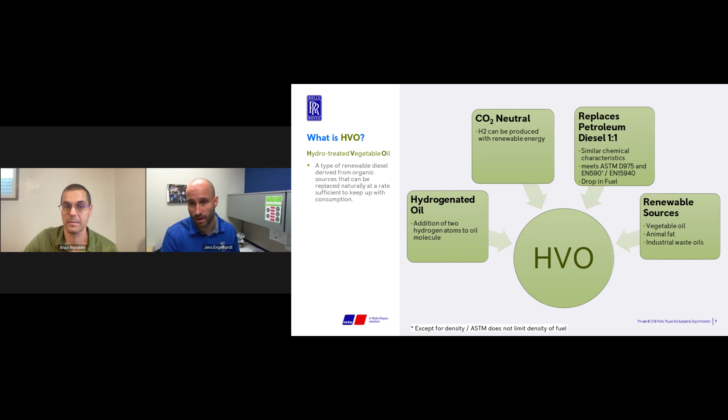But of course, besides CO2 neutrality, we also have to make sure that if we replace our fossil fuel with some other kind of fuel, we don't see any other disadvantages. That means we want to make sure we still get the same power, and the same or even lower emissions, otherwise we jeopardize our label. And in terms of longevity, we want to make sure our customer doesn't have any disadvantages in terms of lifetime. What we're looking for when comparing fuels is whether they are chemically comparable or chemically different to each other. That's what we're going to look into on the next couple of slides.

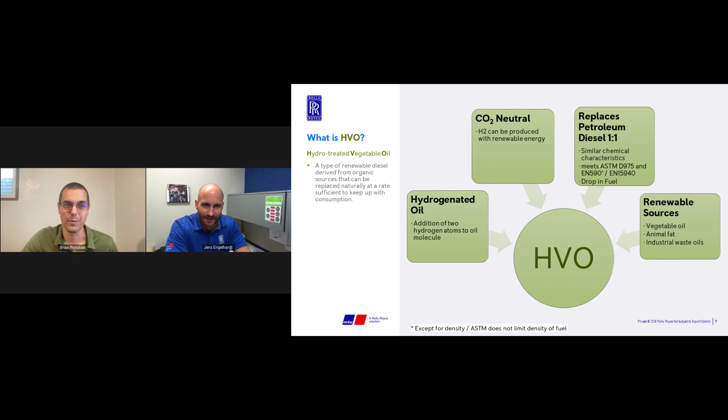And I think this leads us to the next slide, explaining a little bit what HVO is actually not. You talked about how this comes from various feedstocks, and to me that sounds a lot like biodiesel. Let's talk about what it is not, and how it's different. I have a feeling we're going to get into some chemistry, but let's start talking about this from what it is not, or how it's different than biodiesel.

Yeah, so it is not a biodiesel, exactly, Brian. It's not a biodiesel, or as we know it, FAME. You're absolutely right — it uses exactly the same feedstock, the same vegetable oils. Nevertheless, the process that produces this fuel is different, and the result is a chemically different fuel compared to fossil fuel, whereas HVO is chemically comparable to fossil fuel. That's why HVO is also considered a drop-in fuel — you can run 100% on HVO, whereas with biodiesel you usually have to blend it with your fossil fuel.

And I think, just to get a better overview of all these different chemical procedures, we have one slide that summarizes that a little bit. Yeah, perfect, thank you, Brian. On top of the slide, you see the biodiesel and the HVO we're just talking about. As you mentioned, they use the same feedstocks, but the chemical process is different. So for HVO...

...we use hydrogen — that's the hydrogenation process. So we add hydrogen to the vegetable oil. Besides that, the whole process also cleans the oil a little bit. That's why we're going to see later that HVO is actually a pretty clean fuel, as are all the other synthetic fuels, which has different other advantages we're going to touch on later in the presentation.

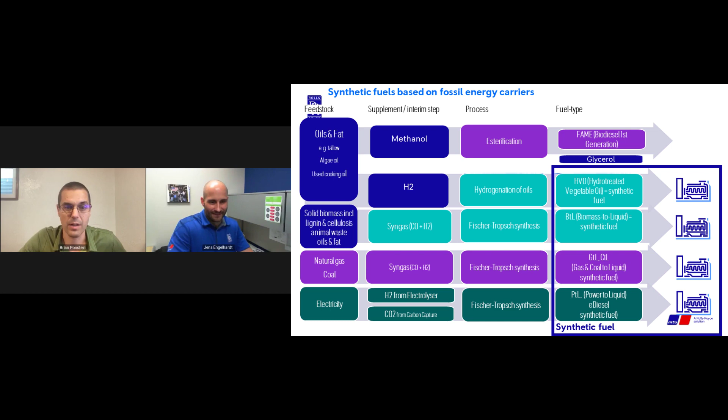Later in the presentation we'll talk about the cetane number, because it tells us something about the ignitability of the fuel. We're also talking about oxidation stability, which is basically an indicator for the shelf life of our fuels.

Looking at the non-regulated characteristics, one important value is the heating value, because it tells us how much energy is chemically bound in the fuel, which we ultimately want to convert into mechanical energy. HVO is actually the best in terms of megajoules per mass. So the heating value here, megajoules per kilogram, HVO is number one.

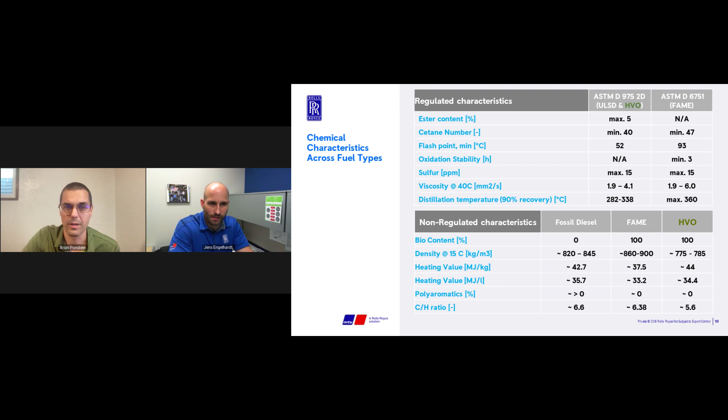Brian, this is more or less the last slide of our chemistry lecture, if I'm not mistaken. Well, we'll try to keep it there. I don't want to go back into what I remember from chemistry - I didn't care for that.

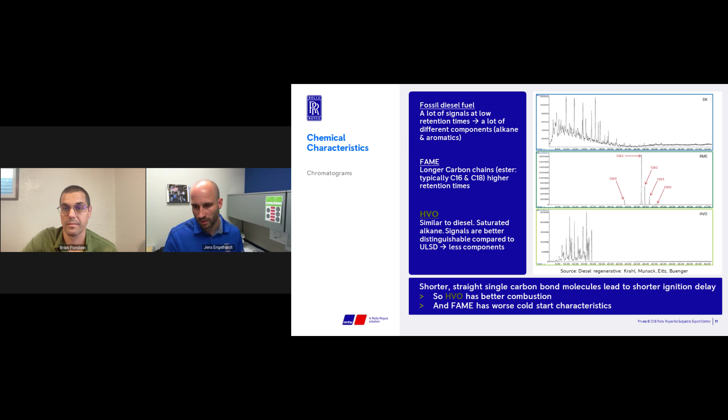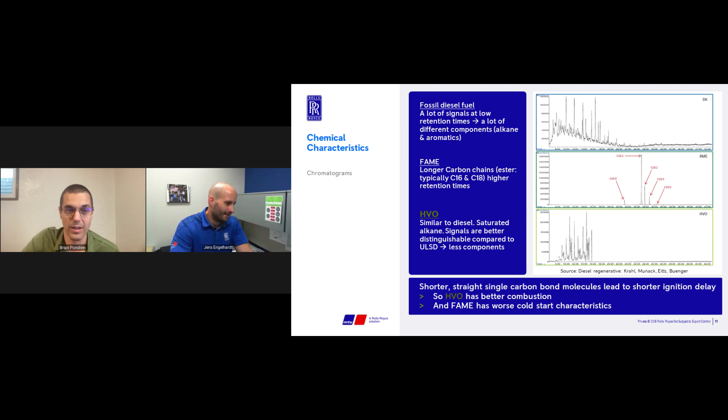Why weren't you my chemistry teacher? I mean, you keep this simple, Jens. I really appreciate it. What I really like is what I'm saying.

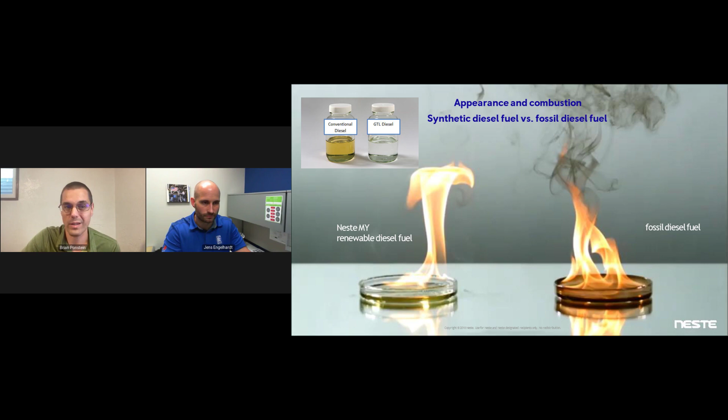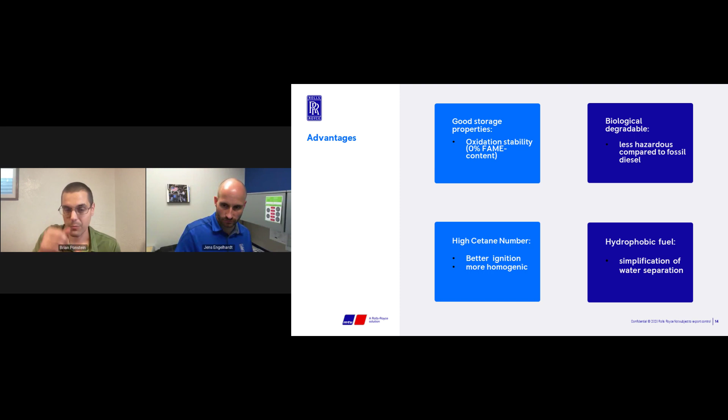But now that we've talked about what HVO is, let's dive more into why HVO. And when we look at that, we're going to talk about some of the advantages. And you hinted at some of this. Really, what I'm seeing is we have these good storage capabilities, but I don't still fully understand why.

So I want to talk about oxidation stability. You talked about cetane number a couple of times. I understand that that's related to ignition, improving that, and just helping out the whole combustion process. But I think there's more to unpack there. You mentioned a little bit about it being biodegradable, less hazardous, and just a cleaner fuel. And then lastly, you started talking about, and you really just hinted on this, the hydrophobic nature of the fuel, basically its ability to reject water. And I know from standby applications, water is one of the cruxes that we have to deal with. So let's first start off with the water content and what's going on there, and help me explain that. I really just have a lot of questions.

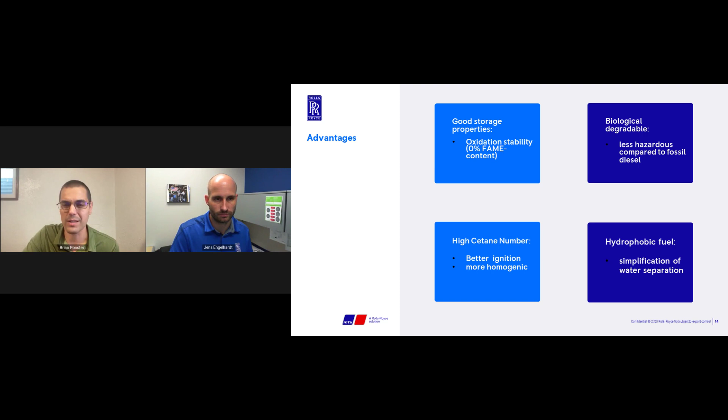Yeah, I try to do my best, Brian.

So we don't want any water in fuel. Unfortunately, there is water dissolved in fuel, and you can basically think of it like our air. If we measure 100% relative humidity at 70 Fahrenheit, and we have the same 100% humidity at 100 Fahrenheit, we know that the air at 100 Fahrenheit, since it's hotter, can simply store more water. It means here in the south, during daytime, we have 100 Fahrenheit, 100% humidity. During nighttime, it cools down to whatever, 80 degrees F. What happens is the colder air cannot hold as much water as the hot air, and we see that basically as condensation, so some of the water falls out. A similar process, exactly the same process basically, happens with the fuel. As you have hot fuel and it cools down, water will fall out. And we need to try to get rid of this water because it can cause severe damage, especially to our fuel system.

Now, the disadvantage of biodiesel over fossil fuel or synthetic fuels is nicely shown here in the chart at the bottom from Donaldson. It simply shows you the capabilities, or basically how much water the different fuels can store, how much water can be dissolved in the different fuels. You can see that biodiesel can definitely store much more water compared to our fossil fuel or HVO. That's why HVO, at least compared to fossil fuel, does not have a disadvantage, but biodiesel definitely is worse, because first of all, we need to get that water undissolved so that it becomes free water, because only then can we separate it. And you can imagine the amount of water that will fall out with biodiesel.

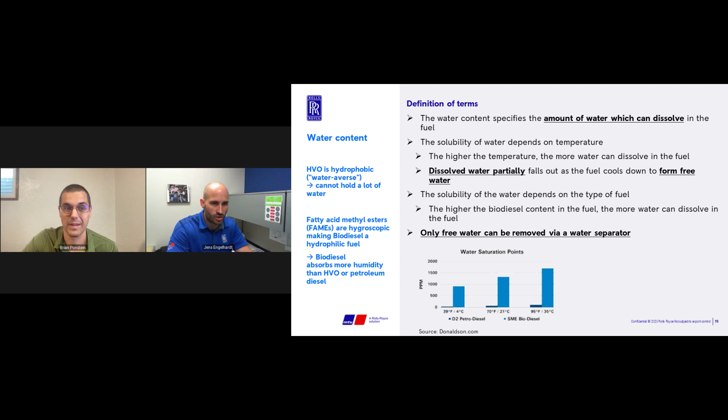And I think, yeah, you mentioned it before. I think you're going to show us also some impressive pictures from the field, what actually happens if people don't pay attention to that. But just quick, oh, no, go ahead.

Some of the issues that we commonly see is we get stuff growing in our tank. Water gives us that environment for fungal growth or microorganisms to start growing in the fuel.

It also causes issues with our fuel components. The fuel is used as a lubricator, and if I can't lubricate because I have a lot of water in there, I'm going to start wearing them out faster. And I'm going to see things like cavitation as well.

The other thing we can see is in a tank, it can start to rust out the tank. It's related to the water topic, kind of a combination of things, but we start seeing that, and it can show up either in our filters or start plugging our inlet lines, and we can have a hard time getting fuel to our system.

Therefore, we have to design systems with water fuel separators. That's always going to be the case to keep the water out. But the easier it is to get that water out, the fewer issues we have. So that really benefits us a lot by having a fuel that's more hydrophobic.

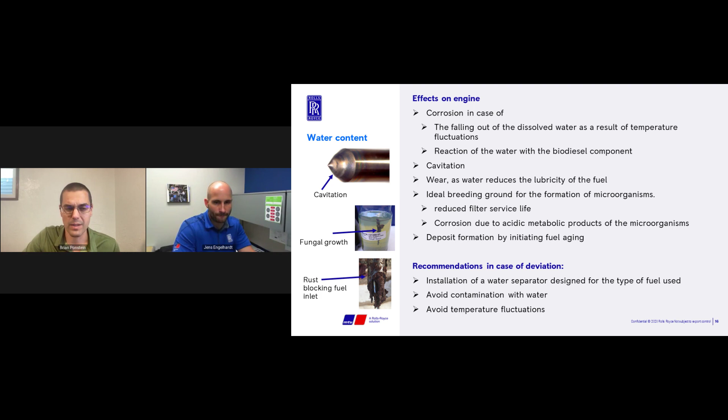You wanted to talk a little bit more about the oxidation or the life of the fuel. What was that again on that chart that we looked at?

The oxidation stability, like you mentioned, especially in power gen, sometimes engines don't run for days, weeks, months. So we want to know how long we can leave the fuel in the tank or wherever we store it before it basically goes bad. The oxidation stability is an indicator for that.

So when we look again at the chemical characteristics, or basically the drivers of oxidation, we have to look at two factors. One is water, we just talked about that. So now we know biodiesel is worse than all the other fuels, and HVO, since it's hydrophobic and doesn't like water, has an advantage because there will be less water as compared to other fuels. And then the second one is oxygen.

So we want to avoid oxygen, because we know if something oxidizes, it usually rusts, it corrodes, and we need to avoid that. I mentioned it at the beginning when we were talking about the hydrogenation process, that the main part of this process is to add hydrogen atoms to the vegetable oil, but it also cleans the fuel. Basically all of the remaining oxygen in the vegetable oil is removed so that there's zero oxygen left in the fuel.

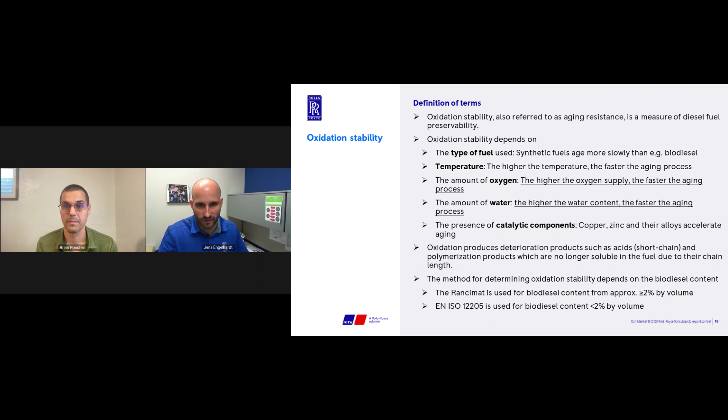And that also explains why HVO has pretty good oxidation stability. I have to say we don't have decades of long-term experience with HVO so far, like we have with fossil diesel fuel, but just based on the chemistry and the science behind it, HVO must have at least the same oxidation stability as fossil fuel.

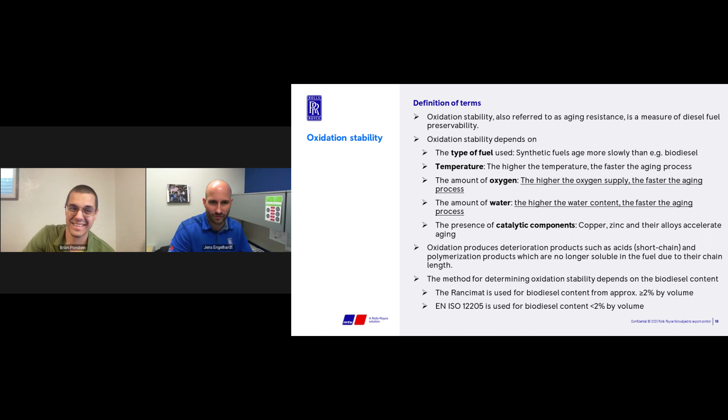And I think, Brian, you found some impressive pictures again from the field. What happens if the oxidation stability is not considered? You know, I like my pictures. That's kind of how I roll.

So what we see when the fuel starts to oxidize is we often see deposits showing up, and these deposits often show up in our injector nozzles and things of that sort. And I'll ask some more questions on this later, but when that injector gets these deposits on it, it becomes a little sticky. And when it becomes sticky, I don't get the performance that I need out of it, so I might not open or close the injector in the timely manner that I need.

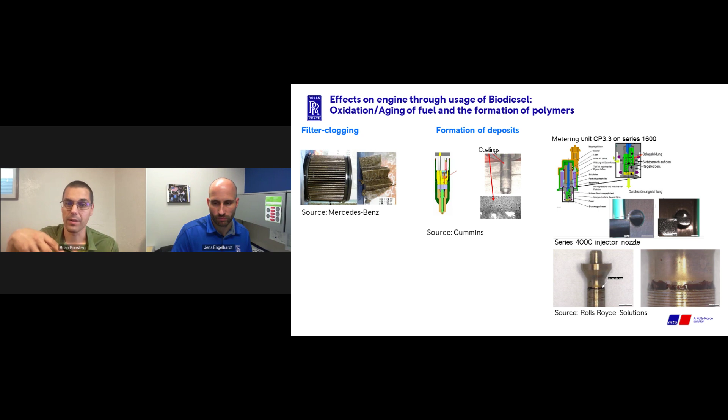Some of the other things we can see, getting into the extreme cases, is these deposits can show up on my filter. This is an example that Mercedes did a study on, where you see a filter that looks like an oily mess. But these are those deposits that have shown up.

And what happens here in a truck application is a little bit different than a power gen. Just to explain the difference, in a truck application, what you see is you're constantly putting your foot all the way down on the throttle, and it just seems sluggish because I can't get the responsiveness out of it.

But in power gen, what we run into is I can't actually get enough fuel to get to the power load that I need to hit. And then, unfortunately, we can't hit it. So then we generally trip out on under voltage or under frequency, whichever comes first, and the unit comes offline, and it causes issues. And we want to make sure that we maintain that reliability. Having a fuel with better oxidation stability or long-term storage just benefits us even more. So that's really what's happening there from an application base.

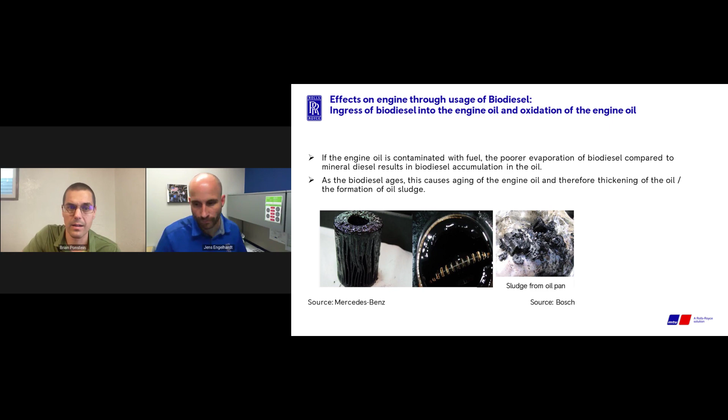And some of the stuff that maybe you have seen out there. But we talked a little bit, and it's related to this, about cetane index or cetane number. I've heard both terms. Maybe you'll help me explain the difference between the two, but what are we really getting at when we talk cetane?

Yeah, what we've touched on so far is basically what happens with the fuel in our application before it's actually injected into the cylinder. Now we want to look into the combustion process itself in terms of performance and emissions. The cetane number is one of the indicators that tells us a lot about the ignitability of the fuel. In our diesel engine, it's compression ignition. What the cetane number really measures is the time difference between injection and start of ignition. This is called ignition delay. The higher the number, the shorter the ignition delay, and the lower the number, the longer the ignition delay.

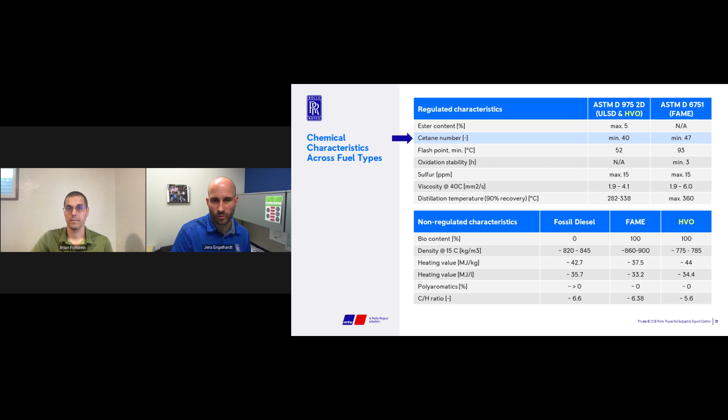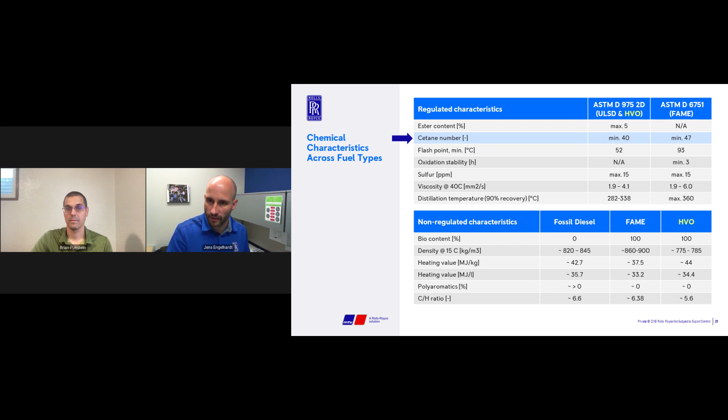Our average gas station diesel, if we think back to the specification we just looked at, ASTM D975 defines a minimum of 40. What we usually see in the lab with gas station diesel is somewhere in the high 40s to mid 50s, which I would consider a good diesel fuel. Compared to that, HVO and other synthetic fuels are in the 70s or even higher. So in terms of ignition delay, these synthetic fuels must be better, with shorter ignition delay. Again, that is explained by the chemistry. They are cleaner, shorter, linear carbon chains. They just ignite better.

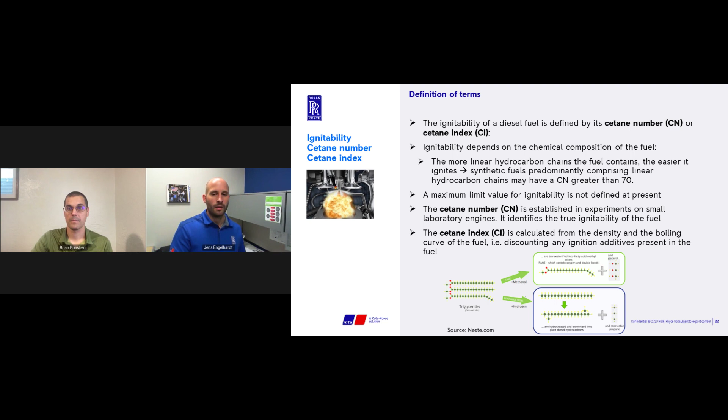Okay, why is that actually important? Because if the opposite happens, if we have a long ignition delay, it can cause massive problems, even leading to catastrophic failures. And it also has an adverse effect on emissions. So Brian, what you can see here is not an HVO fuel. I just took two diesel fuels with two separate cetane numbers to explain the ignition delay a little bit.

The top chart shows the heat release of both fuels, and the bottom chart shows the pressure traces of these two fuels. If you look at the top chart where the arrow is pointing, the red curve, the fuel with the higher cetane number, so better ignitability, you can see the pressure rise and heat release start earlier. On the x-axis, I would say it's at around -11, -12 degrees crank angle. The orange one simply starts later. The graph says there's a difference of about 1.5 degrees. That tells us that the diesel with the cetane number of 50 starts igniting earlier.

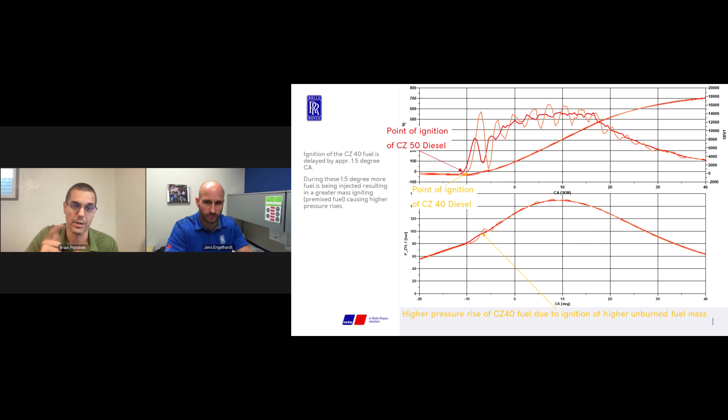But like you said, this all ties back to emissions. And I know that you've done some testing on this as an R&D expert. Let's dive into what you've seen when you've tested this and really focus on the emissions. So when I look at the actual unit, what are the emissions coming out of it? Do they change? Do they not change? What have you seen?

Yeah, so we have actually done two studies. One was actually done in the field, and this is the first one we are looking at. We used mobile emission measurement equipment. They are not as precise as our lab grade equipment, but for comparability reasons, definitely good enough. What the team has done here is replicate the D2 cycle, which is the standard certification cycle for our power gen engines: 100% load, 75, 50, 25, and 10% load.

And you can see here they ran it with heating oil. In Europe, commercial customers are allowed to use heating oil instead of gas station diesel, but it's again chemically similar. And they also used HVO, and I think the most impressive chart is the top left corner. You can see the soot emissions dropped significantly using HVO. Top right, you see the NOx emissions, slightly lower, greatest advantages in the low load area at the 10% point.

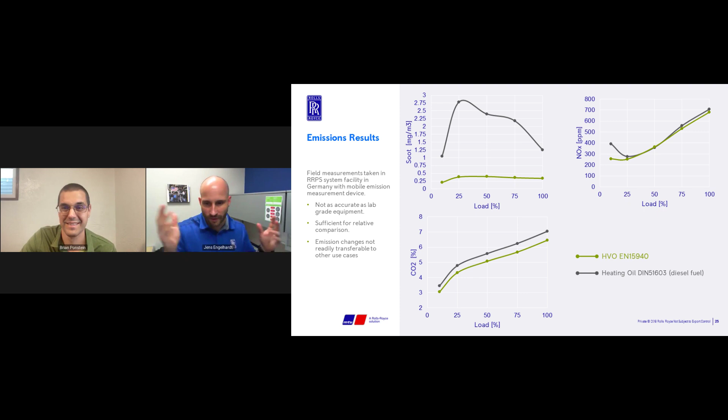And then CO2 emissions, slightly lower, but as I mentioned before, we're talking about decarbonization, we're trying to be CO2 neutral. This is maybe not the significant effect somebody would expect when we're talking about 90, 100% CO2 reduction. Again, we are burning a hydrocarbon fuel, so we are always going to be emitting CO2. That's why we need to look at the entire life cycle of the fuel, and we're going to talk about that in a minute. The CO2 advantage can simply be explained because the C/H ratio of HVO is lower compared to the other one, so it simply has a little bit fewer C atoms in there.

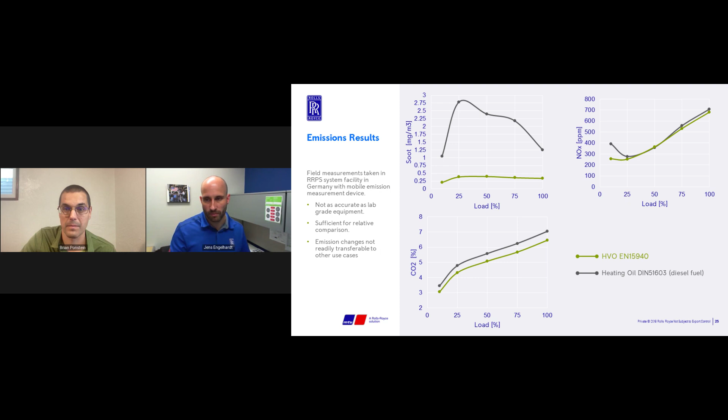But this is really not the big advantage. I think the key news is the emissions do not increase, which is good because that means our emission label is still valid. And actually, most of the emissions we were measuring went down, soot emissions most significantly.

That is quite impressive. Yeah, and this just summarizes it. You can see here soot between 73 and 86%. This is massive. Also, just a quick disclaimer: that cannot be simply transferred to any other engine, because the type of engine and the way the combustion works need to be considered.

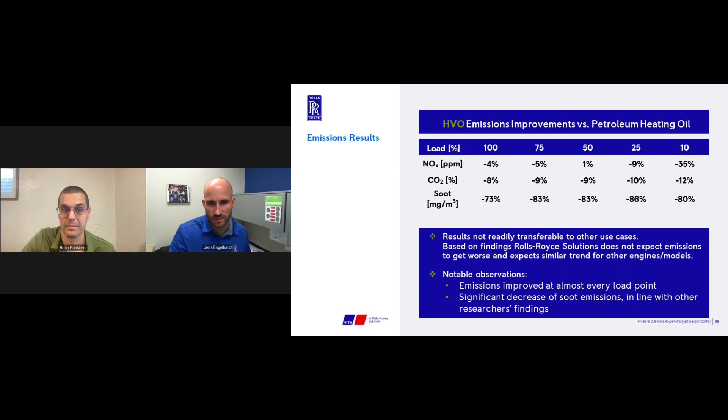But we're going to see later that we confirmed these results in our lab, and we also read some papers from other researchers, and our experimental results are basically in line with theirs. So if you want to use HVO on your engine and it's been approved by your manufacturer, you should see similar trends, definitely.

Brian, these are the results of the second study we did. This was actually in our lab, a 1065 certified lab. And we ran exactly the same D2 cycle with HVO and ULSD. Here at the top, I do not have the individual results of all 5 cycle points. This just shows the weighted average of the total cycle. And on the upper right corner, you can see the soot, or in this case, we measured gravimetric PM emissions.

Significant reductions. I'm sorry, the scaling is a little bit misleading because it looks like the NOx emission reduction was greater than the PM, but it's not true, because on the NOx side we come down from 4.6 to maybe 4.35, whereas on the PM side we come down from almost 120 milligrams to 80.

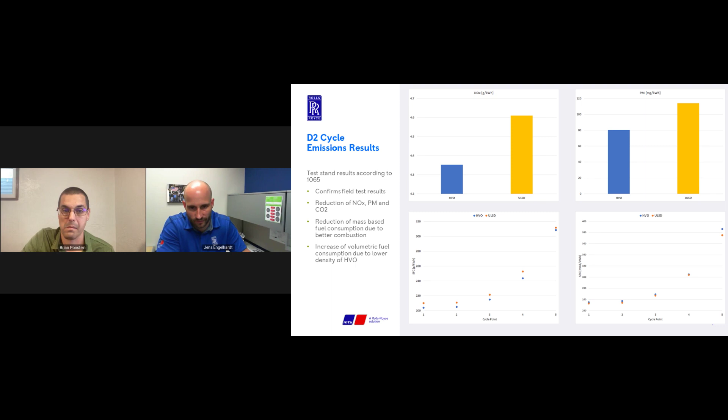So the lab test confirmed the field test, and of course we also measured fuel consumption because that is equally important. And here you can now see the difference I mentioned before when we compare the heating value in terms of megajoule per kilogram versus megajoule per liter, or per mass versus volume. Bottom left is the specific fuel consumption as we know it in grams per kilowatt hour.

And it's not a surprise, since HVO has the better heating value and better combustion efficiency because of the higher cetane number, that HVO has lower specific fuel consumption. But if we look at the chart on the right side, again, we see the density disadvantage of HVO. So in this case, the fossil diesel has a slight advantage over HVO fuel.

And like I mentioned, I'd like to talk about whether we need to change how we do our fuel sizing, if we should do it more like the airplanes where we do it by weight, or if we should keep volume. But that's a whole other webinar, a whole other discussion.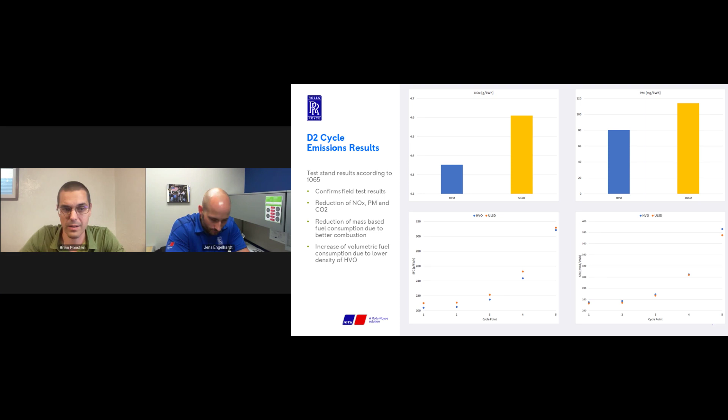But you said we had some data based upon other sources just to look at that. What do we got? Yeah, so it's not a coincidence or just luck that it works that well with our engines. Other researchers basically found the same results. This is a paper I found, an automotive study here at full load. Please just focus on the black and the orange lines. They also did some additional testing.

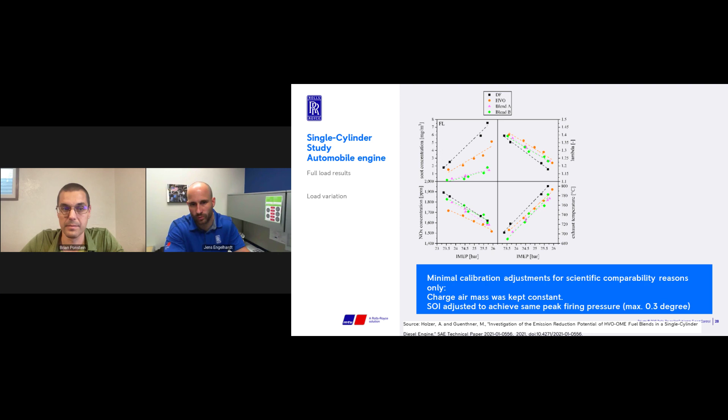So you can see black is our fossil diesel fuel, orange is the HVO fuel, and again, top left corner, soot emissions, and all across the board the orange line is below the black line, which confirms the soot reduction we have seen as well. So this was the full load result, and I think they did the same for part load points.

And the chart on the left side looks a little bit different now, because here it's soot over NOx emissions. But again, at constant NOx, 2 gram, 3 gram, 4 gram, 5 gram, the orange line is always below the black line. So at the same specific NOx emissions, you will always have lower soot emissions with HVO. And this confirms our findings and also the findings of the competition.

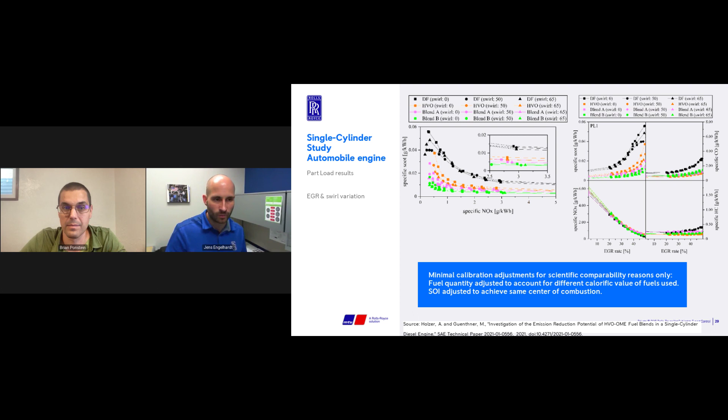So much about emissions. The good news is we do not see any disadvantages. We don't see any risk for existing tier 2 levels, for example. However, especially in power gen, Brian, as you mentioned, it's equally important that we can still maintain 100% power. And I think you have some slides that will tell us more about that. Yeah, that's very key.

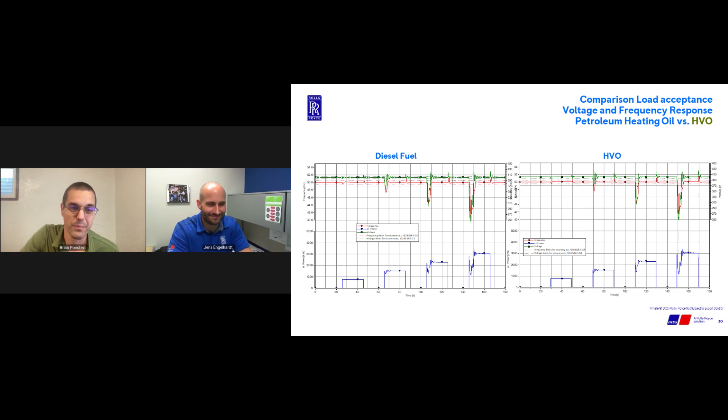So Jens, maybe a little pat on the back for all the hard work you guys do over at the R&D facility. I do appreciate it. You make my life super easy. I'll have to get you a beer sometime, but keep up the good work. I'll remind you next time something goes wrong.

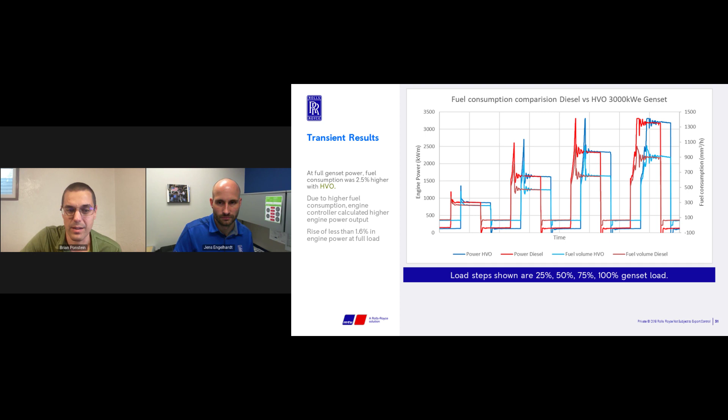Fair enough. And when we look at the fuel consumption between the two, this is just during operation. We showed it in those other charts, but we did the same thing on a complete genset just to validate the whole system. And yeah, you do see a little bit of the difference we talked about, but nothing super drastic that we really had to worry about.

And then, let's talk a little bit about the overall emissions. We do have to speed up to make sure we get time for questions.

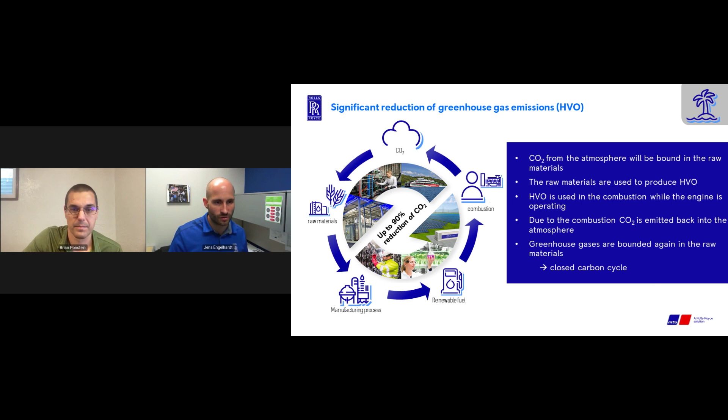Yeah, definitely. So now we want to talk a little bit about the decarbonization approach of HVO. Why do we see this as a chance to transition to carbon neutral fuels? As we've seen on the slide with the engine out emissions, there is still significant CO2 emissions. So we have to find a way to reduce CO2 emissions differently, and therefore we're going to look at the well-to-wheel calculation of a synthetic fuel.

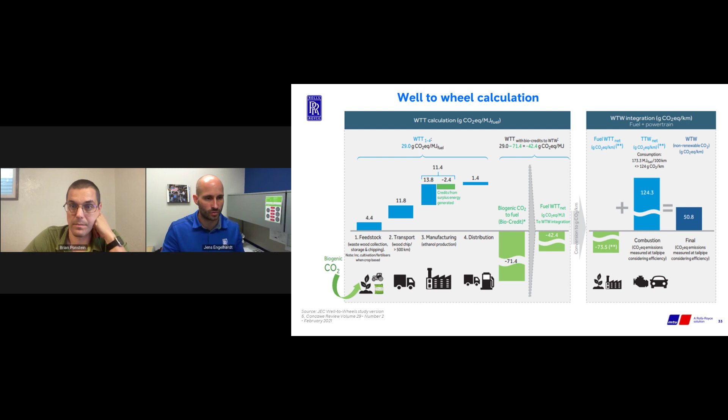When you look at the whole process, we already see there's maybe room for improvement when we look at the 29 grams of CO2 that are being emitted during the production and transportation process. This is also important when we talk about HVO, because not every HVO is exactly similar to other HVOs—it really depends on the feedstock and the production process. I think we have a slide that explains that a little bit better.

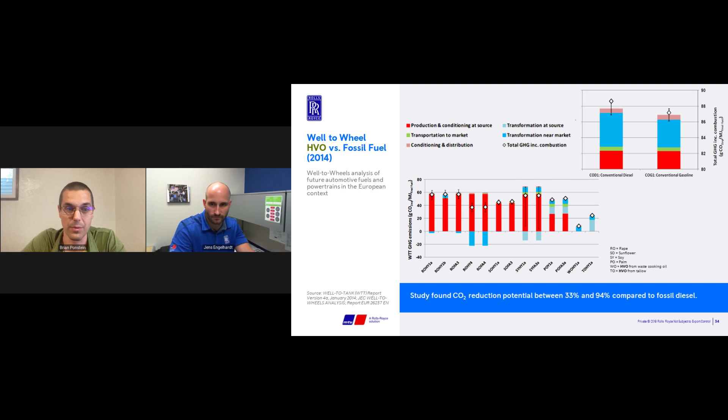I want to talk a little bit about some of the challenges, and I might answer some of the questions since I peeked over at them, and they're related to the challenges I wanted to talk about—related to availability. Like with any new fuel, it's not just readily available in mass quantities. There's a lot of production about it, but we can't switch everything over right onto this fuel. It's no different than any other renewable fuel that has that limitation.

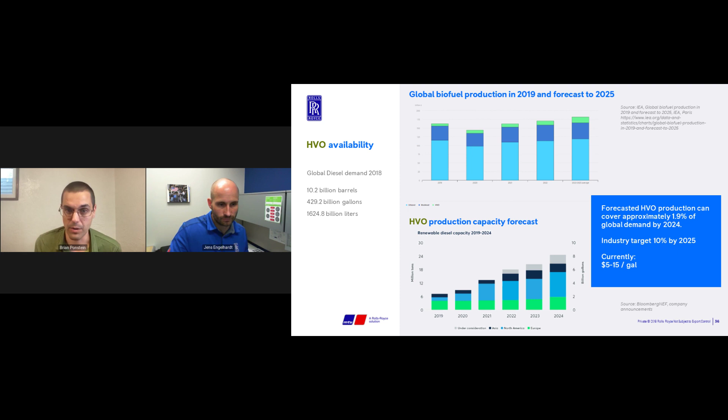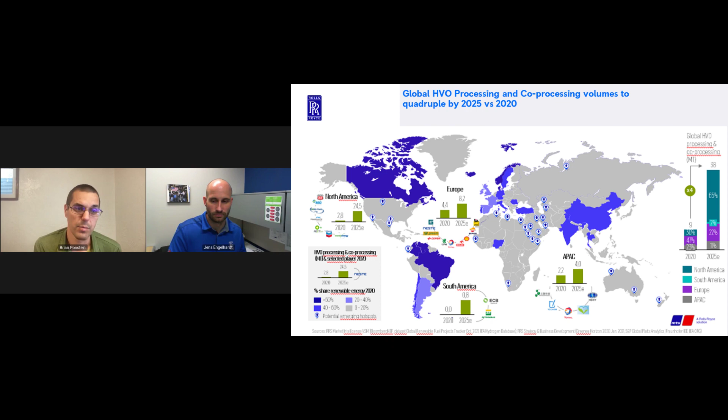The other thing I want to look at is where the future is going. We see the biggest growth really in the United States, or also in South America, where production will go up drastically. By 2025, from a global perspective, about a factor of 4 based upon the 2020 standards. When we look at where these fuels are coming from, most of it in the United States is on the West Coast—that's where currently it's coming in, and where the biggest credits are. We fully expect that to change over time, but that's where it's limited at today.

So we talked about a lot of different things. I'm going to hit this quick because I want to leave some time for questions. We have the reduction of pollutants, the long-term storage, the positive chemical characteristics with the cetane improvements. We get the same performance—it is a drop-in fuel that we can use today. Please do talk to your engine manufacturer before you just use it, just my little caveat there. We have the well-to-wheel emission characteristics.